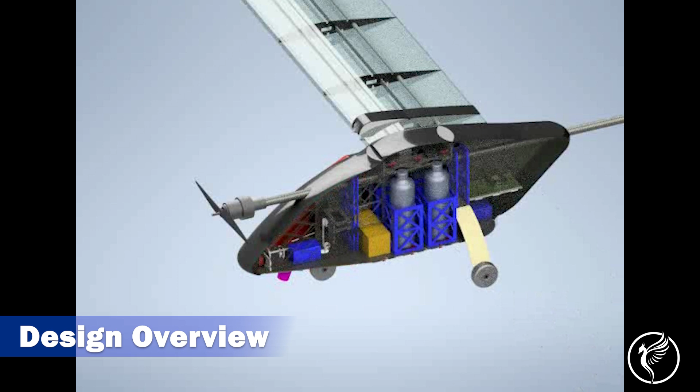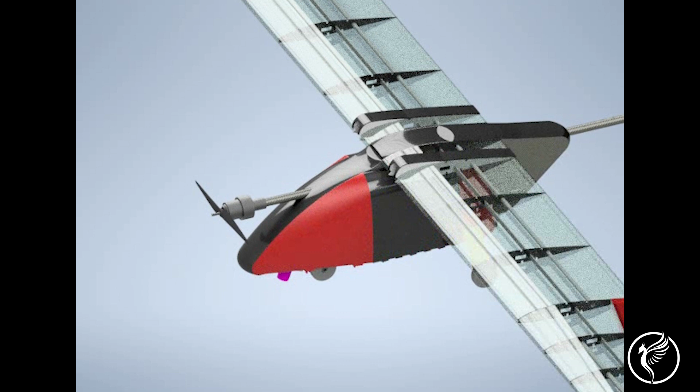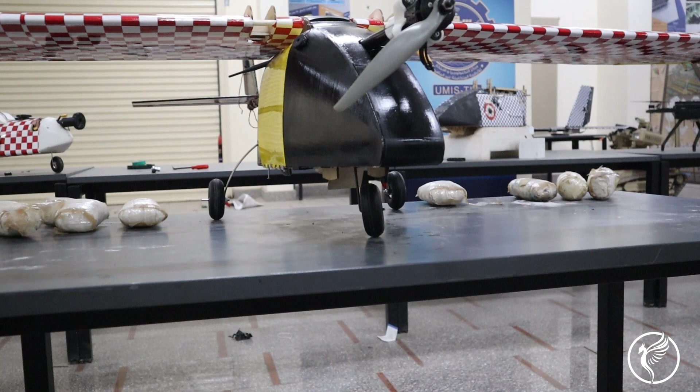It's been designed to launch and land autonomously with landing gear to simplify the UAV movement on the ground. Developing a stable and high-performing UAV necessitates a precise aerodynamic analysis to generate the highest possible lift with minimal drag.

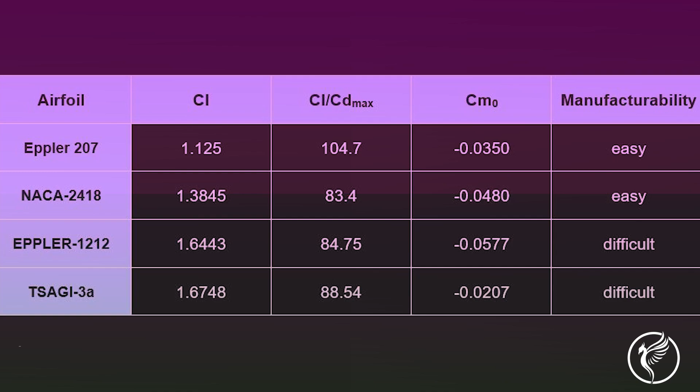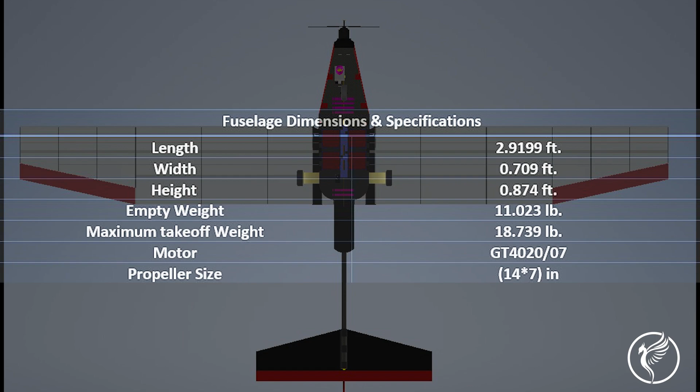In order to properly locate both CG and neutral point, initially located for a static margin of 10%, the CG was found to be at 32.3% of the chord measured from the leading edge, which is the optimal location, ensuring both stability and performance.

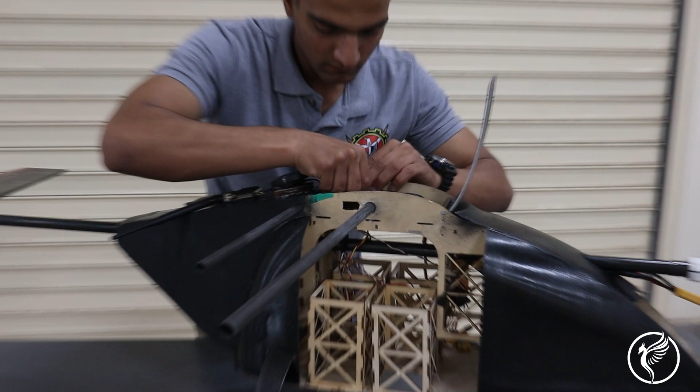In ODLC, we were given two tasks. The first one was to recognize shapes with an alphabet written on it, both having different colors, and provide its data besides its geolocation. The second task was to recognize people in urgent situations and provide their geolocation.

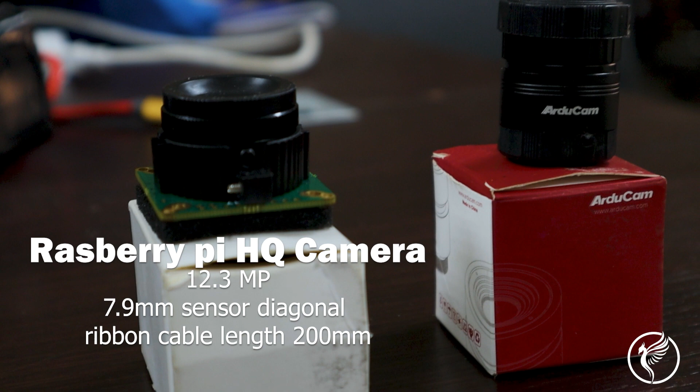For that, we decided to change our vision system from using Canon EOS M50 to using Raspberry Pi high-quality cam to be more compatible with our communication system and therefore give results faster.

Also in the computer training section, we chose YOLO because of its accuracy and speed over other training algorithms. This is helpful in live stream detection while moving at high speeds as planes.

We already used YOLO V5 in the last season. By now, we upgraded from YOLO 5 to YOLO V7. Thus, we have more accurate and faster results.

To start training, we had to get a dataset ready. For that, we use custom-made code to generate a dataset as if it was real footage using the OpenCV library, so that our code could detect real photos after training, and making sure that its dataset is compatible with YOLO V7.

After training, we went through editing our detection code using Python and some mathematical equations to give us both classification and localization results in the most desirable format.

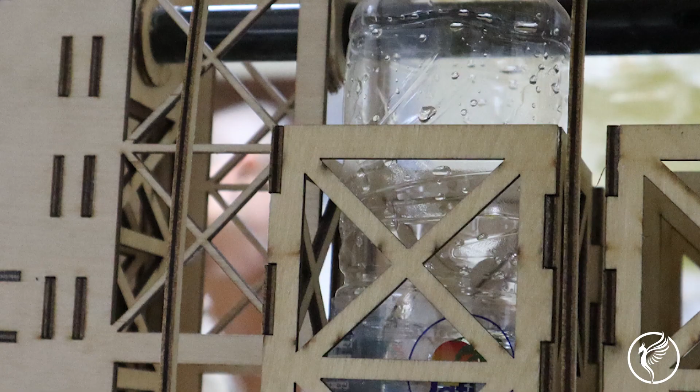Compared to last year's competition requirements, the payload was much lighter and smaller, with fewer drop stages. We had problems dropping the payload in stages, so we designed a new dropping mechanism. The payload size was much smaller than last year's, which was an AGV. To secure a smooth drop-in with the requirements, the airdrop housing and mechanism were redesigned in a new, simpler way.

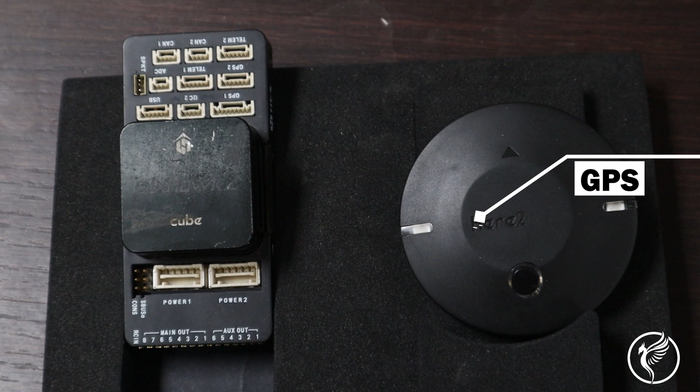Safety pilot communication: in case of manual takeover, a 14-channel FUTABA transmitter, 14SGA, and FUTABA receiver R7008SB are chosen, providing 3-mile range. The system uses frequency hopping spread spectrum protocol transmitting radio signals at 2.4 GHz, which suits the mission requirement.

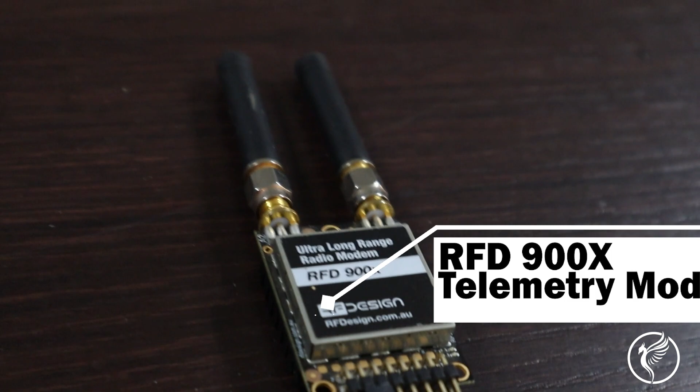Telemetry communication uses the RFD900x telemetry module, providing long range of more than 40 km with high power over 30 dBm, and advanced encryption standard hardware-accelerated encryption to send and receive autopilot data, with a pair of 8 dBi dipole antennas perpendicular to each other to achieve signal polarization, operating at 902 to 928 MHz with a high data rate of 500 kilobytes per second, providing a telemetry rate of 1 Hz smoothly.

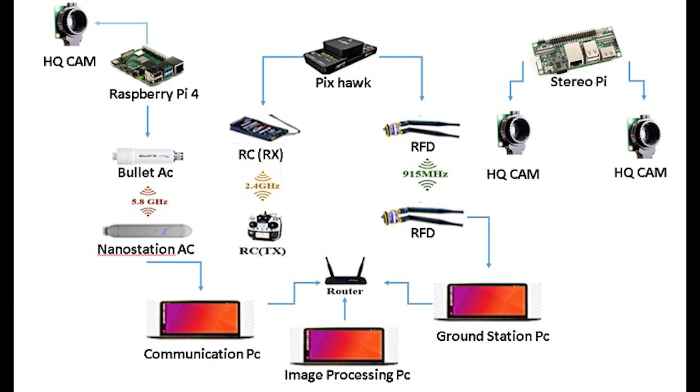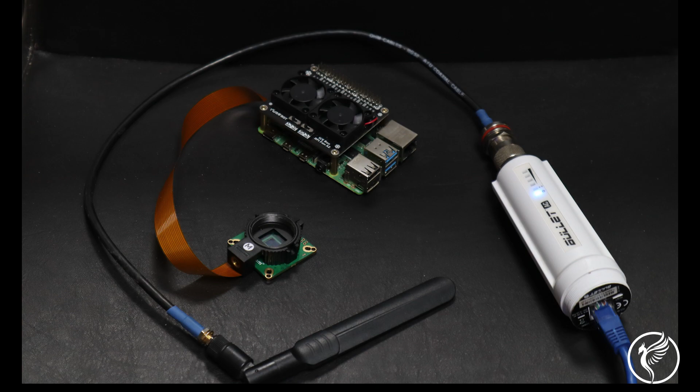For the onboard communication system, the Wi-Fi link has been improved using Bullet AC with its new AirOS 8 software, providing dual-band frequency using an 8 dBi omnidirectional antenna. The Raspberry Pi is controlled onboard using VNC Viewer or PuTTY SSH protocol from the GCS, and images are transferred by Transmission Control Protocol via antenna. It's based on new AirMax AC technology, providing maximum channel bandwidth of 80 MHz with a high data rate of over 300 megabytes per second.

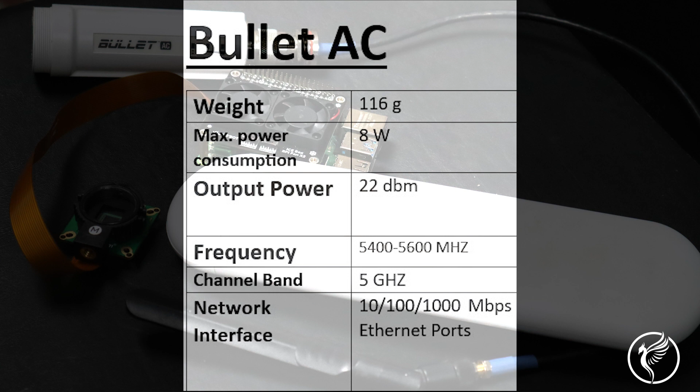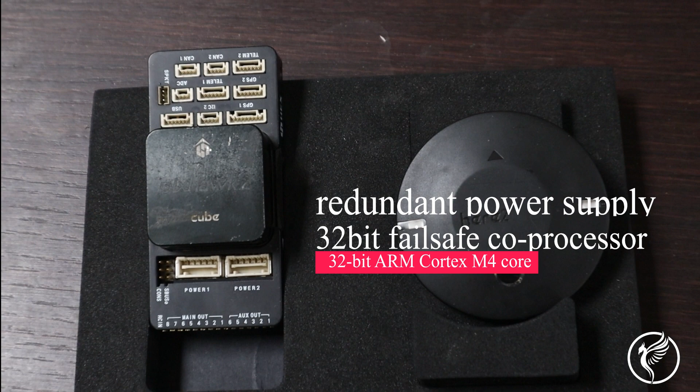For UAV real-time mission data visualization, our choice was Mission Planner GUI, as it's compatible with the Pixhawk Cube MAVLink protocol, and Mission Planner is open source, which provides accessibility. We included a few critical functions to assist in our missions, particularly static and dynamic obstacle avoidance, using GUI strategies: drawing obstacles as circular shapes through the geofence and avoiding them to produce a new path using an algorithm described afterward, ensuring a safe autonomous mission flight for a fixed-wing UAV.

Autonomous takeoff and landing is established by controlling the ascending rate of the UAV as well as the descending rate during landing. Our UAV is reliable for autonomous flight with respect to waypoint navigation, image capturing, and payload drop, then safely returns to ground. The GCS keeps communication with the UAV to ensure continuous receiving of data and images of obstacles or ODLC, and telemetry. Decision making depends on the images captured of dynamic obstacles, ODLC, or any other required images.

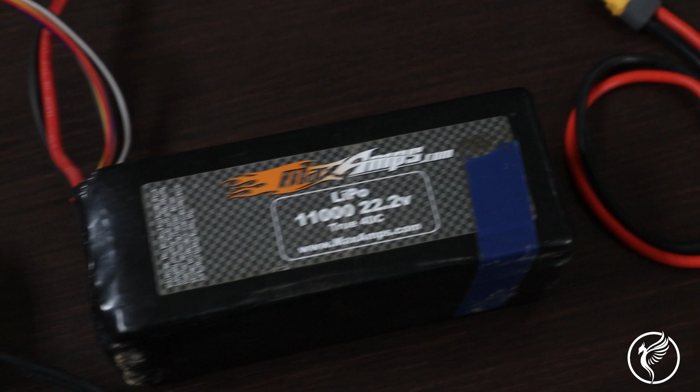For autopilot, we use the Pixhawk 2.1 Cube, here with 2 GPS units, RFD900x, Raspberry Pi 4 for communication, a StereoPi version 2.02 for obstacle avoidance, a 9000 RPM motor, and 11,000 mAh 6-cell batteries, with all cables used being AWG cables.

Stationary obstacle avoidance: after roughly comparing Rapidly-exploring Random Tree, A-star, and tangent algorithms, and running all these in the obstacle avoidance mission, the tangent algorithm was chosen as it passes the mission with high accuracy and short execution time.

If the path has an intersection with an obstacle, the algorithm calculates the tangent and adds a fixed safety distance, creating another waypoint between the two original points with as smooth a path as possible. After adding the new waypoints, the algorithm continues to the next points to check for any intersection with other obstacles.

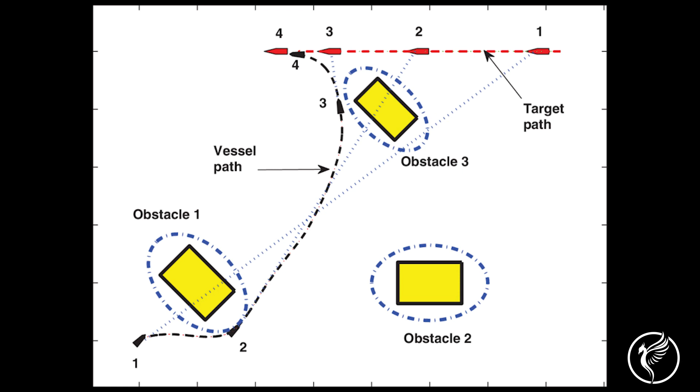Moving obstacle avoidance: we use stereo vision applied by two Raspberry Pi high-quality cameras to detect moving obstacles, such as other UAVs, using the OpenCV library in Python, and avoid them through modifications added to the Mission Planner source code under certain conditions: maximum height 380 feet, minimum height 100 feet.

If another UAV enters the safety distance, one of these actions is taken. First situation: if our UAV is above the other UAV, it will rise 20 feet more without exceeding the maximum height. Second situation: if our UAV is below the other UAV and above 120 feet high, it will descend 20 feet. Third situation: if our UAV is below the other UAV and under 120 feet high, it will create a guided point, and our UAV will go to it for a fixed time, then return to the path and continue the mission.